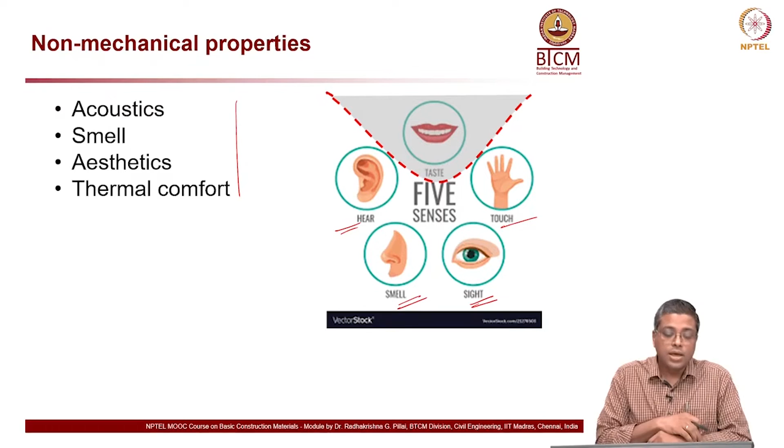Okay. Acoustics is associated with the ears, right. If somebody is speaking in a room where you are sitting, you need to be able to hear the sound very clearly. You do not want echo. So, these are some of the things which you might be seeing in many places where you visit. You will see a lot of these perforated wall elements, or roof elements, or if you are in an auditorium, you will see some cloth material on the wall. These are all sound absorbing materials.

Okay. Let us say you are in an auditorium and you replace these cloth materials with steel plates or some metal plates, you will not be able to hear the program very clearly, because there will be a lot of echo. So, these are very important aspects of design, and materials have to be chosen appropriately.

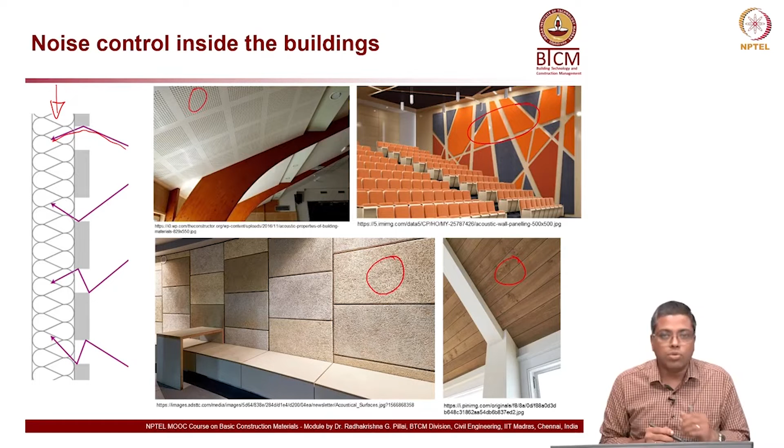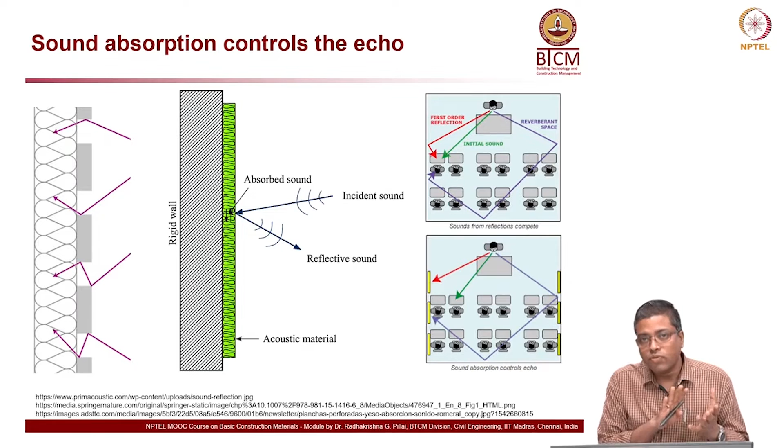So many things we started introducing into our buildings or structures, and now the cost of the skeleton has reduced, and if you take the overall contribution to construction, the cost of the other things like interior fittings, finishing work, etc., has significantly increased. I just wanted to mention this because these are all non-structural elements which play a significant role both in the functionality of the building and in the cost of the building.

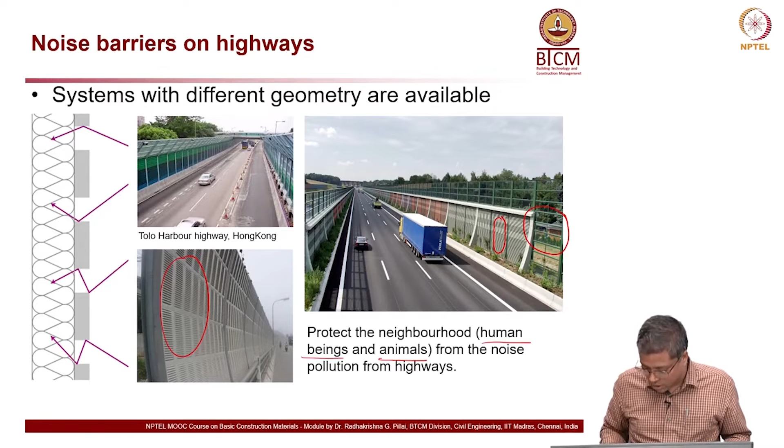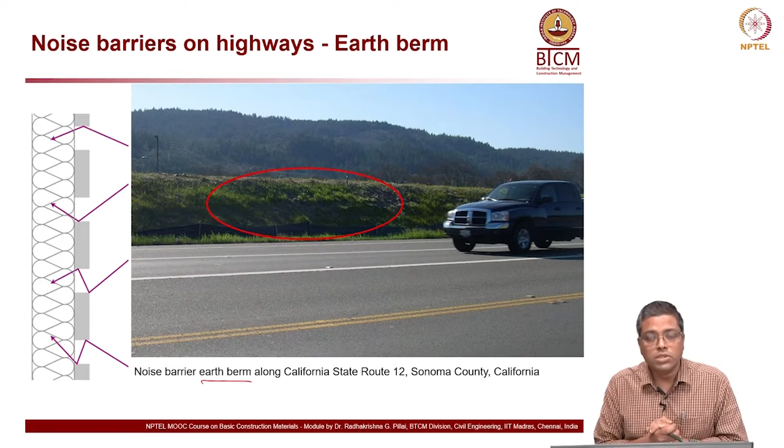This is probably an earlier version of noise barrier, an earth berm. This is from California. So, you can see a barrier made out of soil, and of course, you have small plants, grass, etc., growing that will absorb a lot of noise from the vehicles.

Okay. Now, the other thing which we have to worry about is the smell, that is our nose, the sense. The smell of wood, paint, etc., sometimes creates a lot of problems. I remember many cases where people had to keep the window open for a few months before the foul smell of the paint goes away.

Or if you use some chemicals in construction, that might have some long term adverse effect on the comfort level. In that case people will have to keep the window open, otherwise they will not be able to work. So, these are all things which can go in as technical specifications. When you try to purchase paint, you should ask whether it will have any bad smell and things like that.

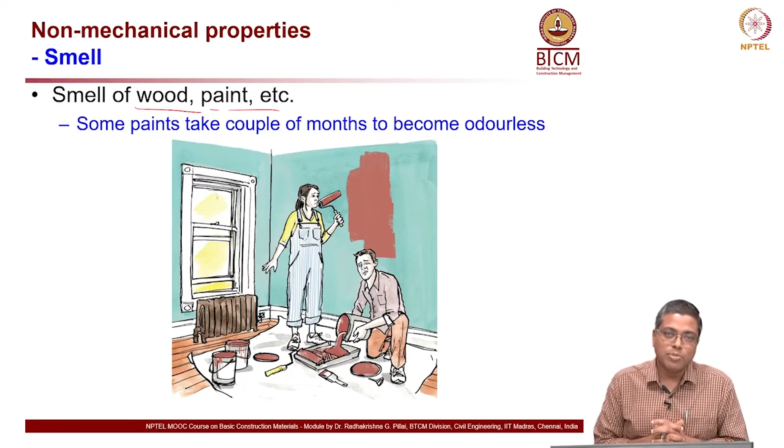Okay. I just wanted to bring up all these aspects because sometimes we get overwhelmed with the mechanical properties alone, but there are other non-mechanical properties also which play a significant role in material selection.

The other thing is aesthetics, and there is nothing more to talk about this except the fact that we must remember functionality when we talk about aesthetics. Functionality is very important. Aesthetics should not affect the functionality of the structure or whatever facility we are building, but aesthetics is definitely dependent on person to person.

Something which I like, you may not like. I might like red color, you might not like the red color. So, it is all person to person, architect to architect, this will change. But there are different factors which we can consider while designing the structure.

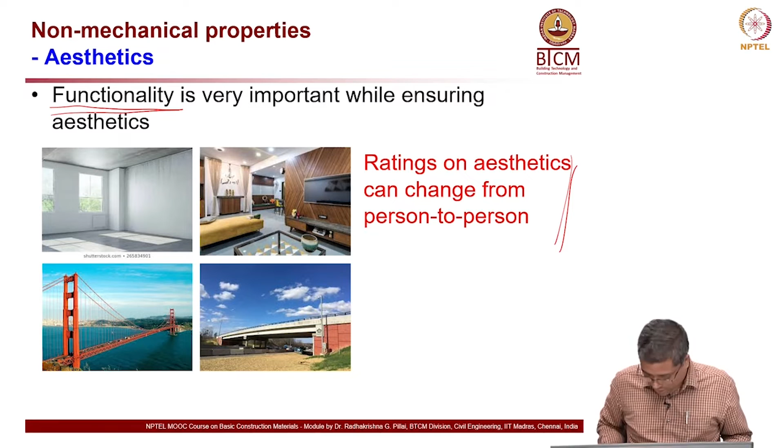Okay. Now, another parameter is thermal conductivity. Again, it is becoming more and more important today because we are talking about climate change, a lot of heat, especially in countries like India. In cold countries you want to contain the heat inside the building because the outside is very cold, and in countries where the climate is very hot, you do not want the heat to come from outside to inside the building. So, both ways you want to prevent the exchange of heat through the wall, that is the idea here.

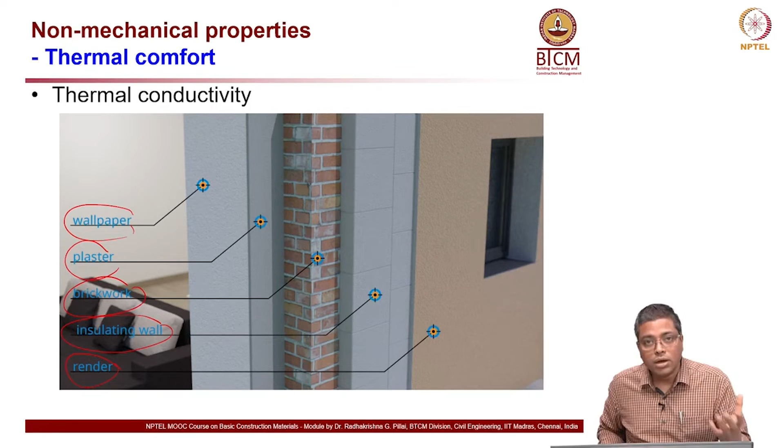So, here is an example photograph, again from the internet, which shows various elements: wallpaper, plaster, brickwork, insulating wall, rendering. These are different components of a wall, and they all can play a role in making the house or the building thermally comfortable.

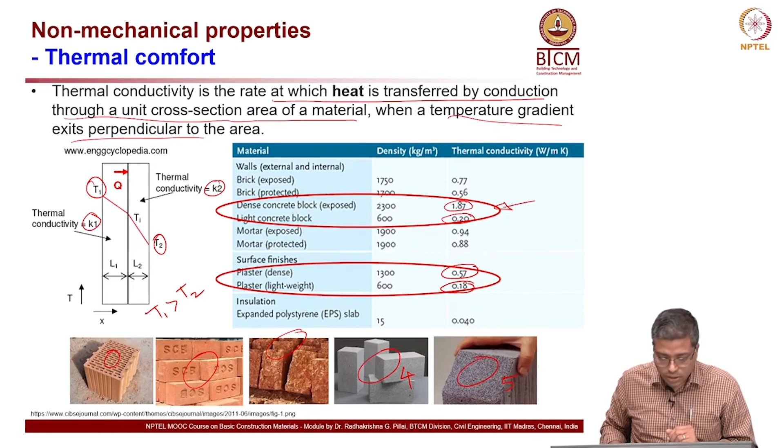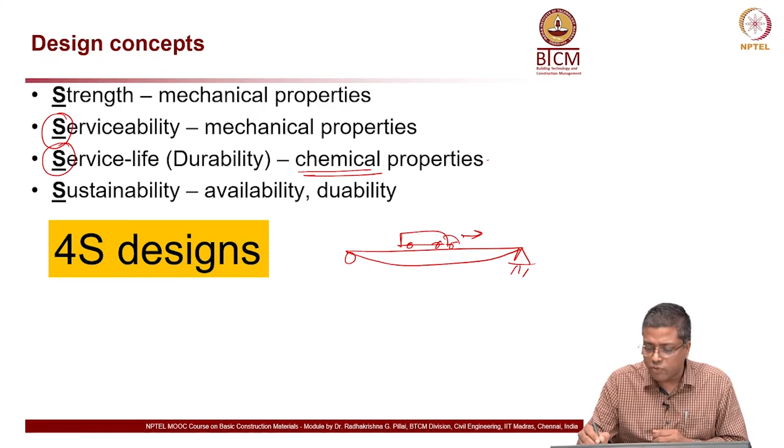Then there is a third one, durability, which is gaining more and more popularity nowadays because we want our structures to last very long. In such cases, chemical properties matter, and also mechanical; mechanical plus chemical properties are important. For example, one area I focus on is corrosion or deterioration of concrete structures, where corrosion is essentially an electrochemical mechanism. We look at the interaction between the steel and concrete in a particular environment, whether steel will corrode or not. So I can change the chemistry of the steel and the concrete to have a durable structure. It is essentially service life based or durability based design.

If you want a structure to last for 100 years, you will see what type of concrete and what type of steel, what steel-concrete combination, will give you 100 years of life. Or if you want the structure to be built for only 20 years of life, you can decide accordingly. You do not need to use a material which will last for 100 years. So, while designing something, you should know the required service life, how long you want the structure to last, and then select your materials accordingly.

Then sustainability is another thing, where durability is very important, but you also have to look at availability of the material and the carbon footprint. There are many factors we have to consider when we talk about sustainability. People should like to use that thing forever, the technology should be sustainable, and at the same time the material should be available for as long as possible. I am going to call these the 4S for design concepts. So don't worry only about mechanical properties; you also have to think about other properties while designing structural systems.

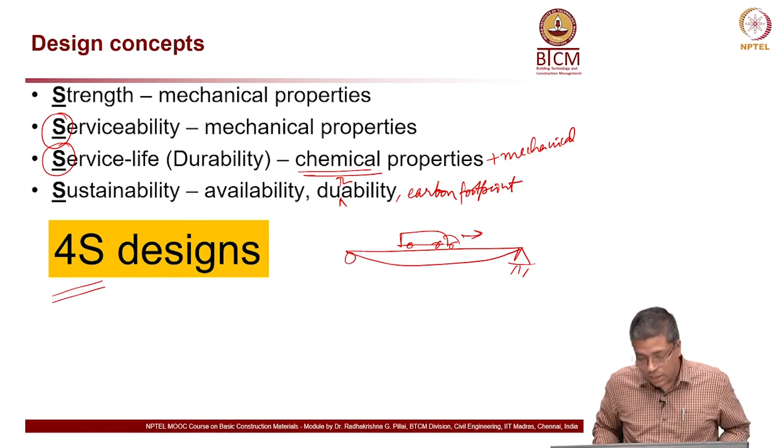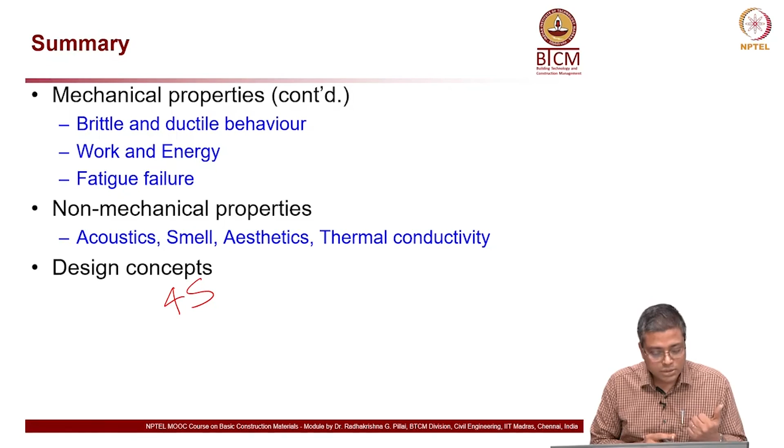Now, to summarize, we talked about brittle and ductile behavior, work and energy, and fatigue failure. Then we talked about non-mechanical properties such as acoustics, smell, aesthetics, and thermal conductivity, very briefly though, and finally looked at the 4S design concepts: strength, serviceability, service life and sustainability.